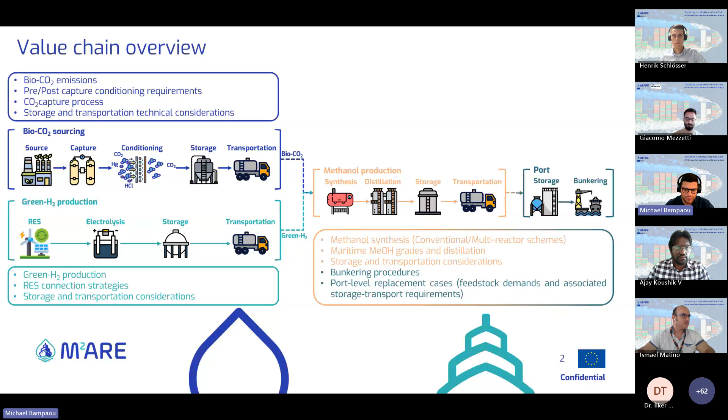So starting first with the bio-CO2 supply. So the bio-CO2 sector is a complex sector in terms of volumes of upstream processes, composition, impurities, and also emissions per plant. So in that case, we started by categorizing the different bio-CO2 emission sectors by low purity and high volume, which are the pulp and paper industry, biomass combustion, and also the biogas sector, and also regarding high purity and low volume, which are the bioethanol sector, food and beverage, and biomethane. So those sectors differ in terms of total CO2 emissions.

The CO2 concentration in the stream, for example, combustion-related processes, which are mainly referring to pulp and paper and biomass combustion, are diluted in terms of CO2 concentration, contain a lot of nitrogen and also NOx and SOx emissions. Seasonality aspects are also very important. For example, when biomass combustion is connected to a district heating plant, this means that the CO2 emissions will be higher towards the winter season where heating is required. Also, current uses of bio-CO2 are very important. For example, in the food and beverage industry, since CO2 is very pure, it is also used internally.

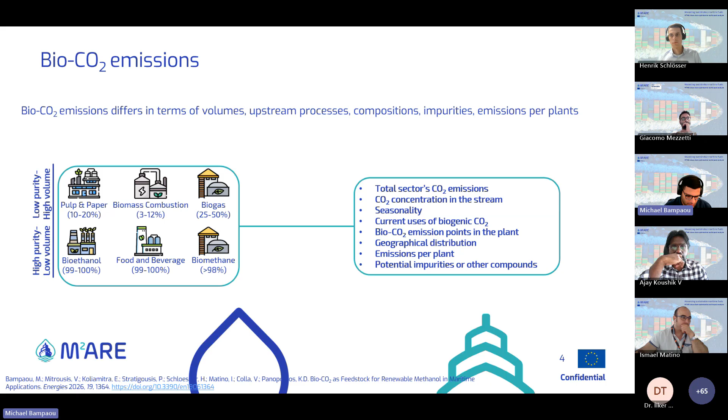Geographical distribution and the emissions per plant are very important also for the logistics, since larger plants with concentrated emissions, which is mainly the case for fossil plants, but also for pulp and paper and biomass combustion units, could enable economies of scale also for producing methanol in an economical manner. So also very important is the potential impurities or other compounds that might be included within the stream. And this is also very important since it depends also on the biomass feedstock and on the upstream process before emitting the CO2.

In that case, regarding the impurities, what we did is we performed within the project 4 sampling campaigns at 2 biogas plants and 1 biomethane plant and 1 biomass combustion plant. We also employed a CO2 capture unit using membrane gas absorption using a DEA mixture in order to offer a compact and relatively novel technology for carbon capture also for smaller scales. We evaluated the impurities across all the stages before, during, and after capture of that CO2.

So we performed the sampling of those plants and analyzed the solutions using standard analytical protocols, and also included the regeneration step to recover the high purity CO2. So what we found is that in biogas campaigns, after capture, the residual chlorides were higher than the catalyst tolerance limit for that particular sampling day and period. And also very important was that the NOx levels for the combustion flue gas were also increased, so it might indicate that you would need some pre-capture conditioning before applying the capture technology.

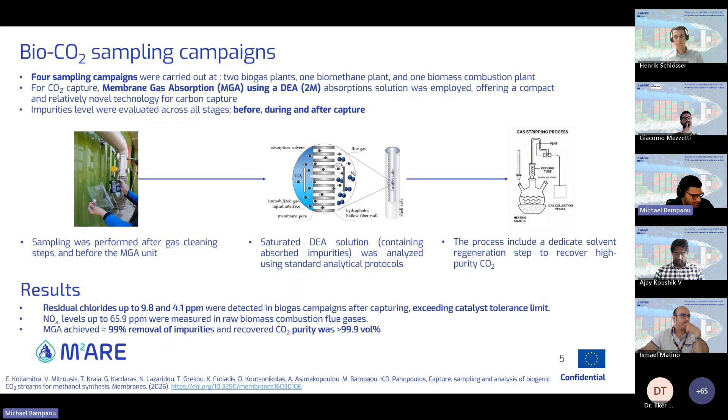And what we also showed was that approximately 99% of those contained impurities were removed using the MGA unit, and the purity was 99.9 volume percent of the CO2.

Now, going forward, after capturing the CO2, we would need to store it in order to account for the difference between the production and the usage of CO2. CO2 can be stored in a liquid or gaseous form, which will also differ in terms of the pressures and the temperatures that you would need for both forms. In terms of gaseous, there are also compression requirements to compress the gas to the storage pressure. And for the liquid form, lower volumes are required, but you will need specialized equipment.

In terms of transportation of the CO2, since in many cases methanol synthesis will not be done where the CO2 is also emitted, you will need to transport the bio-CO2 to the synthesis site. So this could be done with pipelines in dense or supercritical form. So you would also need compressors and booster stations to account for the CO2 and the pressure drop. And for lower volumes and short distances, trucks and rails are also employed in liquid form. And for ships, so for large scale and long distance transportation, we also see that there are liquid CO2 ships, CO2 carriers, currently ongoing and under investigation.

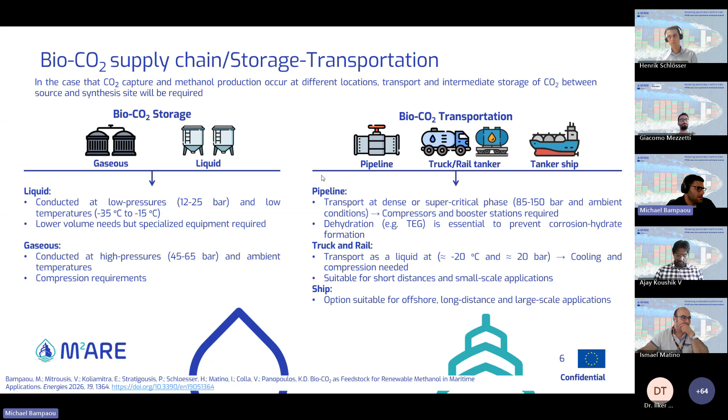Going towards the green hydrogen supply, green hydrogen is also a very restricting component in terms of the overall value chain viability. Green hydrogen can be produced with water electrolysis using renewable electricity, such as solar, wind, hydro, geothermal. The purity is a minimum of 99.9%, and the efficiency could range depending on the electrolyzer technology that is employed. In that case, the electricity price is the main cost driver for producing hydrogen, and afterwards will also be the main driver for producing competitive methanol. So if you can produce renewable hydrogen at a very competitive cost, this will be very beneficial for producing competitive methanol.

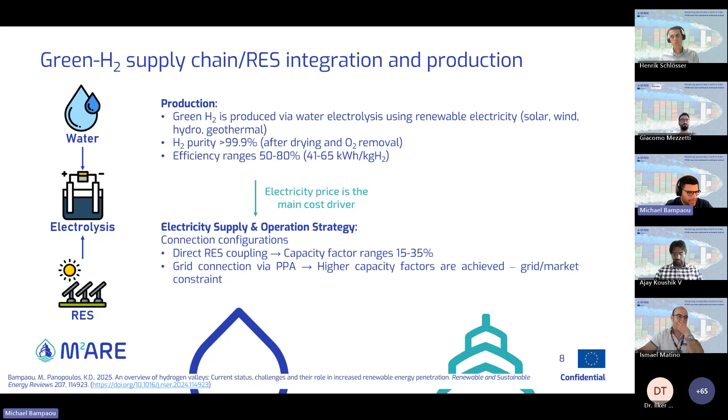Also regarding the electricity supply and the operation strategy of the electrolyzer, electrolyzers can be connected with renewable energy sources directly, which can lead to lower capacity factors overall. They can also be connected to the grid via, for example, certain agreements like a power purchase agreement. You can achieve higher capacity factors, but they are subject to grid and market constraints.

Green hydrogen can be stored as compressed gas, which is widely used and can lead to a certain energy penalty relative to the energy content of hydrogen, depending also on the storage pressure. Liquid hydrogen is also an option, but the liquefaction process is very energy intensive. There are also some other forms for storing hydrogen, such as cryocompressed, but they are at a lower TRL level and have a higher complexity compared to the other two options.

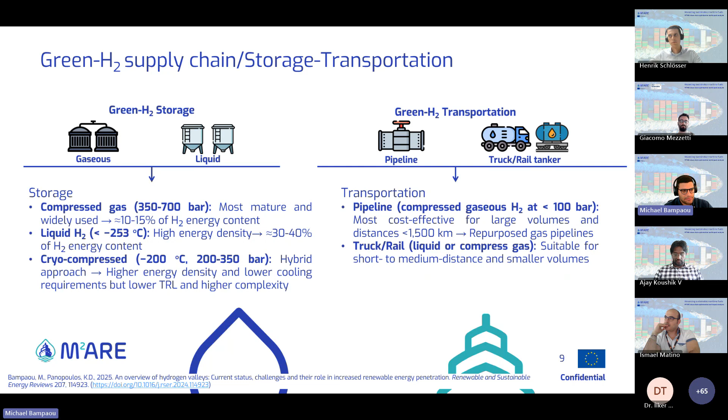Also, hydrogen can be transported via pipeline, which can be cost effective for large volumes and distances. Also, an option might be repurposing natural gas pipelines, and for short to medium distances at smaller volumes, trucks and rails are also an option to transport hydrogen when it is not produced on site. Now, going towards the methanol production process here.

Conventional methanol synthesis process includes a reactor, high and low pressure flash separation of the products, and a recycled stream in order to achieve higher conversion rates due to the thermodynamic limitations of the process. And finally, you can purify the product to achieve a grade that might be suitable for the engine that the methanol will be used. So you can remove the dissolved gases and the water to produce methanol that might be of MMA or MMB grade or MMC grade that contains higher water.

So what we also investigate in this project is the multi-reactor integration. So in this case, after producing methanol in the first reactor, the liquid products are separated through a flash, where in that way you can push the reaction towards the products again, so you can achieve higher methanol synthesis product amounts without even requiring a recycling stream, which can slow the dynamics of the process, and if there are high inert contents, also lead to accumulations of those components. It also would require larger volumes of the different components.

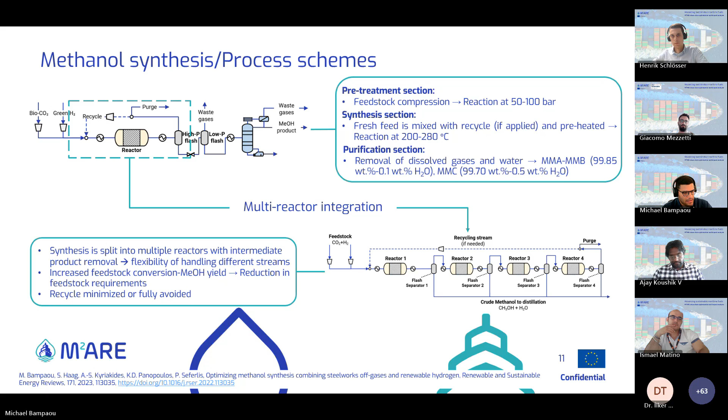So such a multi-reactor scheme has the flexibility of handling different streams, can lead to increased feedstock conversion to methanol, so reducing also the feedstock requirements, and you can minimize or fully avoid the recycling stream depending on the feedstock that you will handle. Now regarding the methanol purification, I hand over to Henrik.

Yes, so in order to test this new simplified crude methanol distillation, we actually built a pilot plant that is directly connected to the existing methanol synthesis pilot plant. So the feed is up to 0.5 ton of crude methanol per day. And then we are able to produce these tailor-made maritime methanol grades. So as mentioned, either these MMA, MMB, or MMC grades, but also to go even higher with the water content. So first tests show up to 20% of water and higher.

And all of the methanol that is then produced in this pilot plant is sent to the project partner Everllence for their engine tests. So within the frame of this research project, the goal is also to test different water contents, also higher than the current specifications allow. Because of course, if you purify your crude methanol less and have more water, it uses less operating costs. And also with this concept, we only need one distillation column instead of multiple ones, which are common in commercial large-scale processes. So we can also save on the CapEx side.

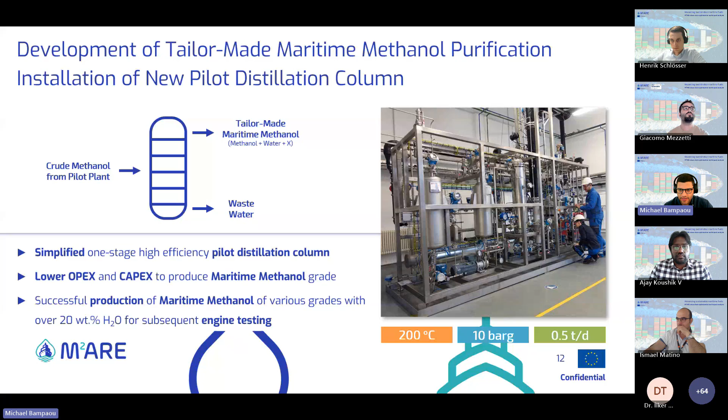Now continue with methanol storage and transportation. So a very important advantage of methanol is that it is liquid under ambient conditions. So it has easier handling than, for example, gaseous fuels like hydrogen. And you can use the existing infrastructure with some modifications, less modifications than, for example, for gaseous fuels. So it can be stored in ambient temperature and pressure with above ground floating roof tanks.

The most dominant method to transport methanol is through shipping and ocean transport, which is mainly due to the utilization of methanol widely in the chemical industry. For small to medium inland volumes and short distances, rail and road tankers can also be employed. Methanol pipelines are mainly used within terminals or chemical industrial sites.

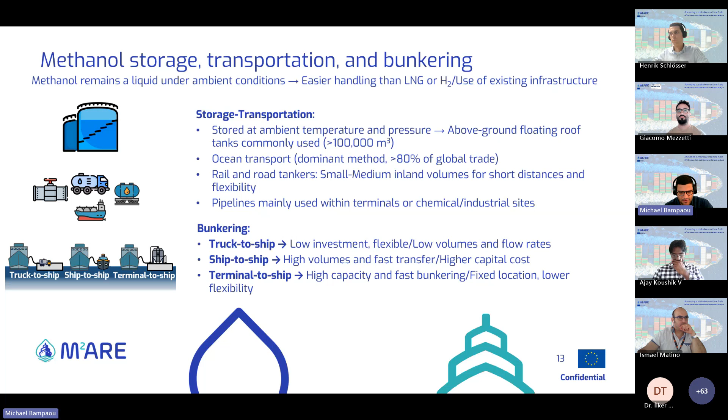There are also mainly 3 different bunkering methods in order to provide methanol to the ship that will use the methanol as fuel. For example, truck to ship has a lower investment and is more flexible, has lower volumes and flow rates. Ship-to-ship has higher volumes and fast transfer, but also has high capital cost. And terminal-to-ship is high capacity and can provide fast bunkering rates. The location is fixed and has lower flexibility.

Now, finally, going towards the analysis of the ports, what we did is we mapped the different bio-CO2 sources based on what we also showed in the first slide, the total sector emissions, the emissions per country, seasonality, current uses, and we also mapped them accordingly in the different EU countries. The same we did also for green hydrogen: where current green hydrogen capacity is located, and the short-term and medium-term targets for hydrogen production.

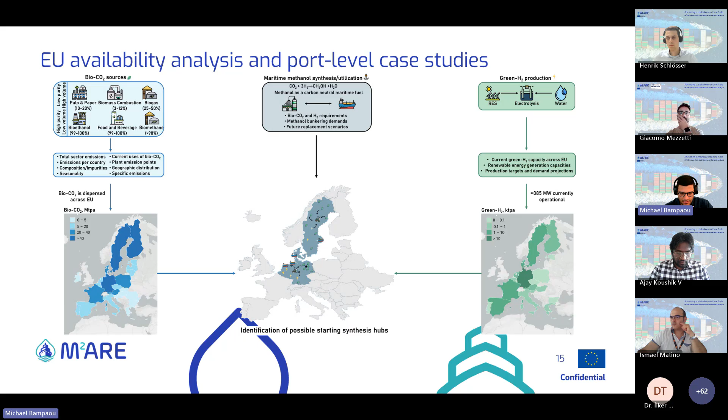And also we identified some indicative starting points in order to use the methanol in ports, where we also considered the port readiness and the activities currently underway in the different ports regarding renewable fuels and renewable energy projects. For the first two indicative cases we considered Rotterdam and Antwerp, the two ports, in order to see what the capacities of the different feedstock would be, how we can efficiently supply them, and if they are in line with the targets, for example, for green hydrogen.

Starting from bio-CO2, for three different starting points for replacement of the fuels, for example, 0.5, 1%, and 2%, you can see that single source supply, from 0.5 to 2% of the bio-CO2, would be feasible for very large scale plants like biomass or pulp and paper facilities. But for smaller scale emitters like biogas plants, other actions should be undertaken, like clustering of the CO2 to achieve the higher capacities required for that replacement.

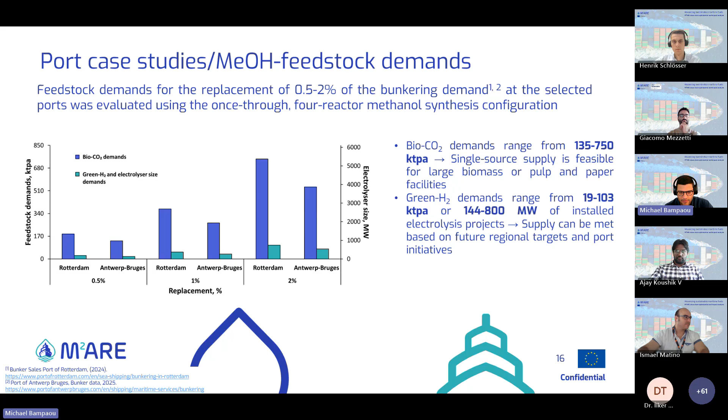Regarding green hydrogen, electrolyzer size demands could range from 140 to 800 megawatt, and based on future regional targets, this could be met if the targets from the European Union and the different countries are on track. Regarding the methanol, depending on the different scales of current methanol synthesis plants, these are within the range currently commercially applied. The challenges would be the capital investment, the operational costs, and the feedstock sourcing, which are the main restricting factors in that case.

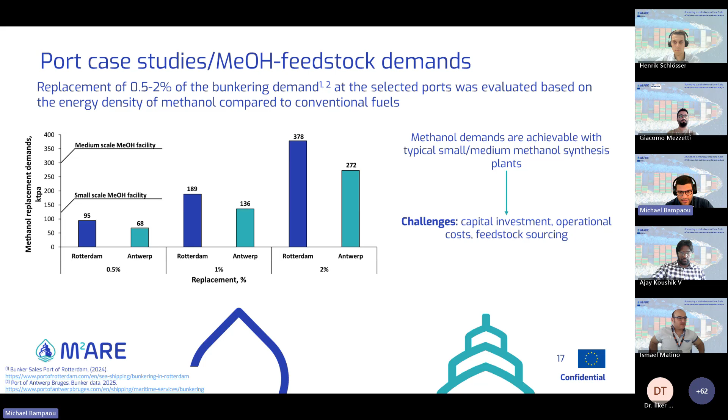Finally, what is also very important is that since methanol synthesis will most probably not take place directly at the ports, large volumes will need to be transported to the ports from the production locations, and the storage demands will also depend on the time frames that you would need the methanol to be stored there. Shorter time frames will increase the reliance on frequent deliveries, whereas longer horizons will provide greater supply security and resilience, but will require more space and more storage capacity.

Currently there are several terminals in the port of Rotterdam equipped for handling methanol, and the same is true for the port of Antwerp-Bruges. Regarding the transportation of methanol, for example, through trucks or rail, truck transportation will require the highest number of trips due to the lower volumes of methanol that can be transported. The main outcome here is that the ports need to have extensive inland connections to the methanol synthesis hubs, and be positioned to accommodate the methanol supply.

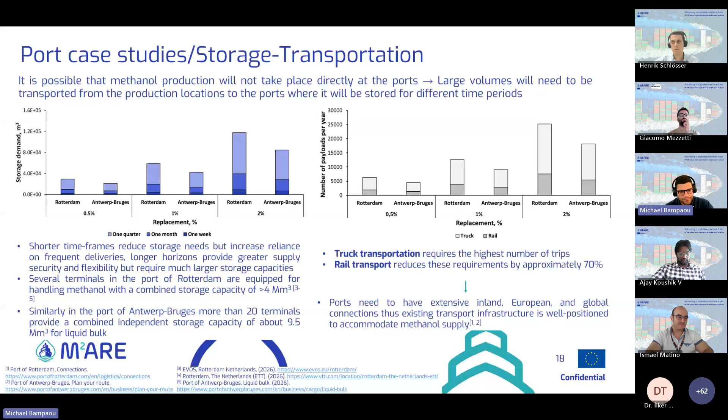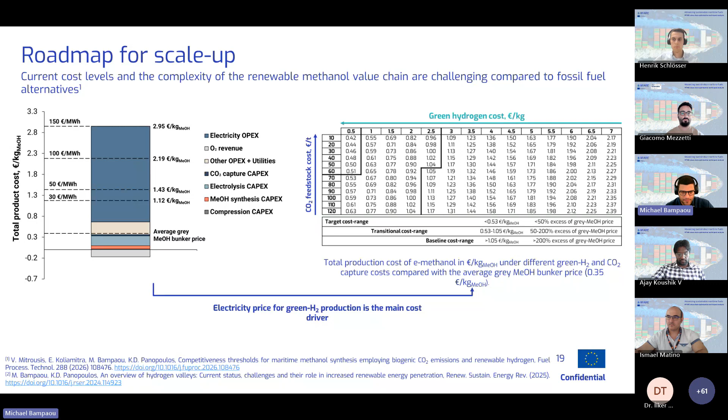Now, just as an overview, what we did here was a first techno-economic analysis, a case study for the biomass combustion plant where we also performed the sampling campaigns that we showed in the first slides. On the left side, you can see how the different electricity prices can affect the final methanol product. And on the right side, you can see how those methanol production costs relate to the current average gray methanol bunkering price at the port of Rotterdam. Green hydrogen cost and CO2 feedstock cost are the main components that can affect the competitiveness of methanol production for maritime purposes.

Now, the final slide: some recommendations and the roadmap to support integration and scale up. As we saw in the previous slides, for small scale emitters of bio-CO2 like biogas plants, bio-CO2 clusters and hubs could support integration and scale up, since they are typically small scale and geographically dispersed. And hydrogen valleys are also under development across the European Union. Hydrogen valleys are a complete hydrogen ecosystem from production until end use. In the future we can also use cheap hydrogen for the production of methanol.

Efficient methanol synthesis schemes, as we also saw in the previous slides, that can handle different kinds of feedstock, will provide flexibility and resilience for the process and can reduce the feedstock requirements. Dual fuel engines that can also use conventional fuels like diesel can be a short to medium term solution until methanol synthesis becomes competitive and available in ports across Europe. And also very important are maritime regulations, since the maritime sector is very conservative in terms of change. They can help close the cost gap and also enable scale up in the future.

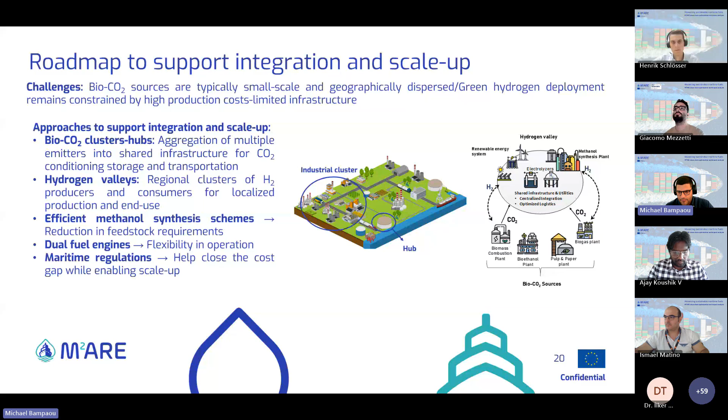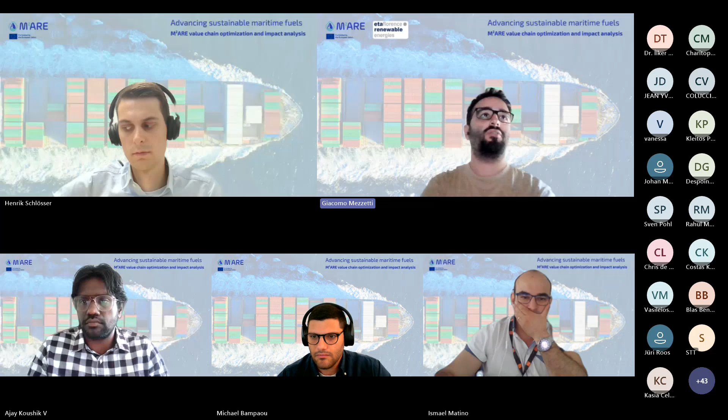So we have a question actually, so we can submit it now. It's from Taras Lenyuk. Hello, Taras. So the question is related to the methanol synthesis section, so maybe for Henrik. What type of reactor have you tested for single and multi-reactor integration schemes, and why?

So currently we have tested tubular reactors, both for the single and multi-stage concepts. And we are currently working on also pillow plate reactors, which offer better heat transfer and lower production costs. So this is what we're currently installing in the existing pilot plant to be able to compare the different reactor concepts with one another.

Okay, thank you very much, Henrik. So I will have just one from my side very, very quickly. During the tests that you conducted, was there any particular challenge or engineering barrier that you encountered? If not, you can say no. It's not mandatory, it was a very generic question.

Of course, there are a lot of challenges always when you build such a plant. For us, one of the main challenges is that as a research, we want to test as many operating conditions as possible. So our design parameters typically cover a wide range. And so within the design, we need to make sure that we can operate at all different conditions safely and reliably. Yeah, I see.

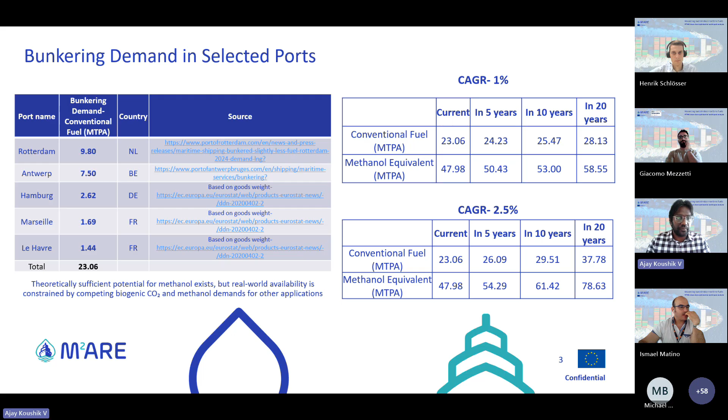So when I was discussing the slide on the circles, we mapped every single plant in these sectors in the 9 countries chosen, and this is the exact geographic locations of these plants. And you see some chemical symbols here, which are possible hubs where methanol can be produced. This is based on some GIS technique. We tried to find out some hubs closer to the plants. And the red ship symbols are the 5 ports that we chose for the supply side of it.

Now, looking into it, what we can infer is biogenic CO2 sources are unevenly distributed. Around France, we have a lot of biomethane plants. Around the Nordics, we have a lot of pulp and paper. So the sources are unevenly distributed. And the ports which we are interested in are geographically at a distance from these plants. They are not co-located, right? So this brings us to two different sets of problems.

The first one is a techno-economic layer, which Michael talked about in his slide on the cost of capture and methanol production and all that. Because the CO2 is available in different concentrations, quantities, and with different kinds of impurities, the cost of CO2 capture is going to be different. Also, the methanol production can cost differently based on how big the plant is, because a larger plant would lead to a lower per ton or per unit methanol cost. So that is one part of it.

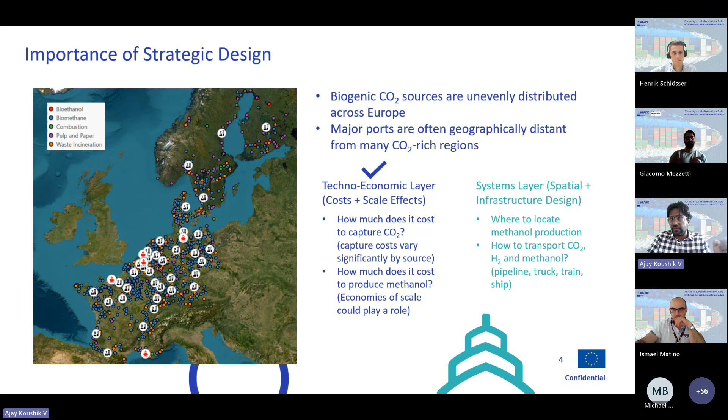Like I said, there are 5 different sectors, all with different characteristics because of size, because of impurities, because of the concentration of CO2 available. So we looked into all the plants and we said, okay, there could be a size range. For example, if you take biogas, there is a size range based on the available plants. Same with biomethane, same with all the sectors. So we chose 2 points on each sector, and we developed detailed models to estimate the cost of all the sectors.

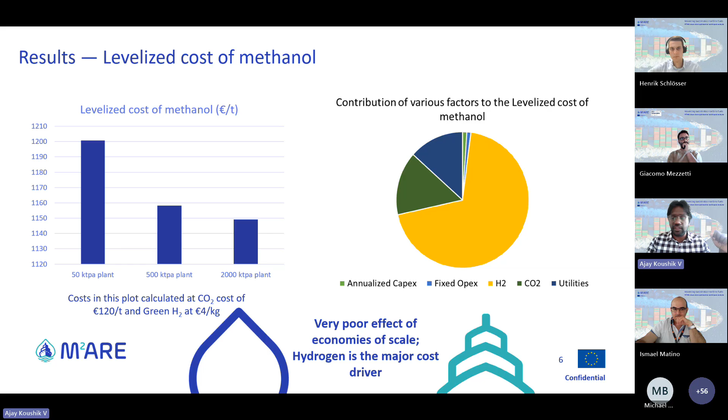And also we took 4 euros per kg, which probably is an optimistic cost for hydrogen. And this is how the methanol stands. Putting them all together, this plot, I'll try to take you through what it means. The sectors, as I discussed all over this presentation, let's imagine every sector is producing methanol from the CO2 of its own. So they will have a different methanol cost, which is what you see on the y-axis.

And these colored blocks here, the green, the dark green, blue, and all these represent different sectors. So for instance, if you take biomass combustion here, it means it costs around 1,120 euros per ton of methanol if you produce methanol from this sector. And it can produce so much methanol based on the availability in 10 countries. And the vertical lines you see here are the demands at different growth rates and different times.

So what it means is the red block you see here, the biogas, may not be necessary even under a high demand case, or unless CO2 is rigorously allocated to something other than methanol, then we are good with these three sectors, which are the combustion based, where the availability is quite large, and it can also satisfy the demand.

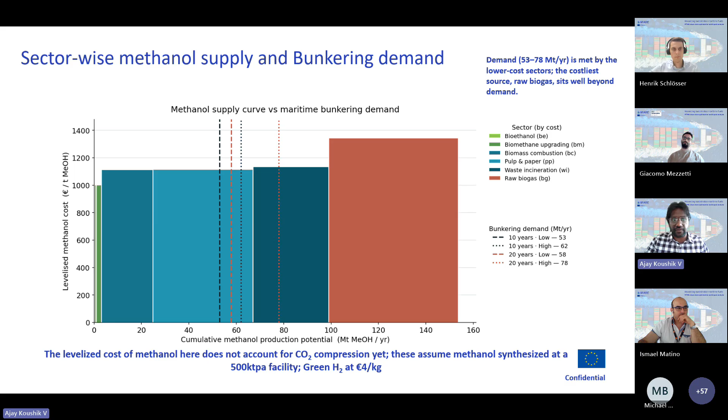Finally, a quick introduction on something called learning curves, for which we are developing a methodology right now. So technologies learn with time. When there are more electrolyzers, more compressors, more CO2 compressors, then we learn them, which means there will be a reduction in cost, lower capital cost, and the efficiency of these things will improve. For example, an electrolyzer can consume less electricity per kilogram of hydrogen, so hydrogen costs will go down with time. And when there is more deployment of methanol plants, the average size of methanol plants will go up, which also means there will be a reduction in cost.

So accounting for all this, we developed a methodology to see, under a severely optimistic condition, how low the cost of methanol can go. Here, it's based on the announced projects for e-methanol so far. It's 64 times more than the current capacity, and the prices can go as low as 720 euros per ton. But this is a very optimistic number; it's just to show you that the prices can go down. And with this, I would hand over to Ismael to continue his talk on production planning. Thank you for your attention.

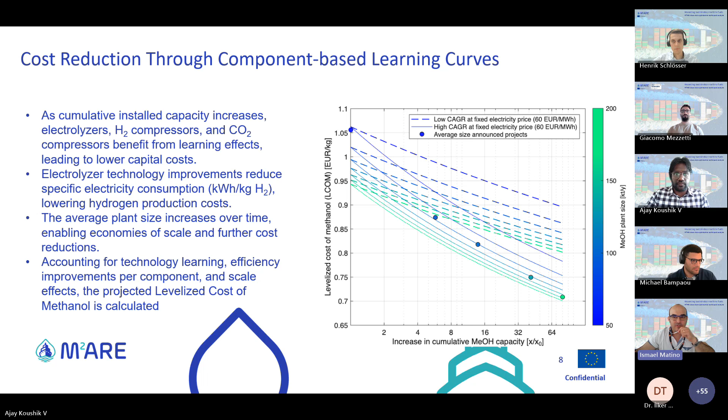Thank you, Ajay. Ismael, sorry, just a second, because we have one question in the chat box. Maybe you already answered, Ajay, but let's try to explore it. It's from Said Bentuba, and he asked the cost of energy consumed to produce 1 ton of methanol, and which technology is used.

I think it's a very generic question in some sense, because energy could mean a lot of things. But when you look into the cost perspective, if you take out hydrogen, then the energy itself is very little. It's less than 5% of the total cost, because the costs of CO2 and hydrogen are the major drivers, like I showed. And which technology is used? It's thermochemical synthesis, which has been widely explored. Thank you very much, Ajay.

So Ismael, please, if you want to continue with the presentation, you can share yours. Okay, perfect. One second. Okay, do you see my screen? Yes, perfect. Thank you.

So I will talk now about the second part of this presentation, the part related to production planning. That is one of the parts we are studying in terms of optimization in this project. With this slide, I want to highlight that this is not a mere optional exercise, but something very strategic. Why? Because in the context of the bio-CO2-based maritime methanol value chain, we have different challenges to be addressed. The key ones are listed here.

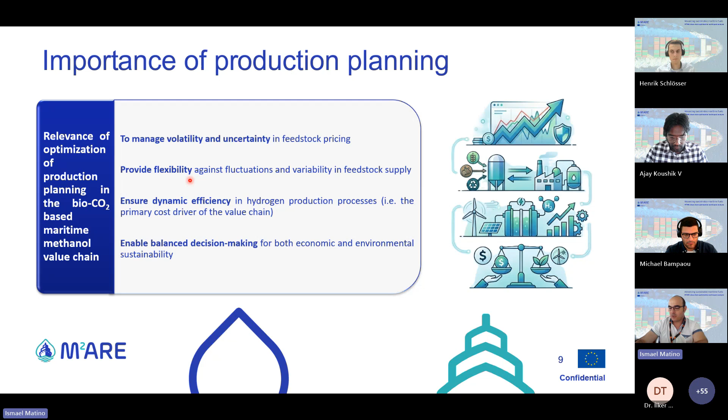Okay, going more in detail, we foresaw in our project to develop a tool that can allow us to optimize the whole value chain on different levels, 3 levels. The first level is the logistic and transportation level. That is something strictly related to LCA and TEA. So that is more or less what was presented by Ajay and by Michael to find the most promising location and transportation options. Then we have the second level, that is the one that I want to describe to you more in detail in these slides.

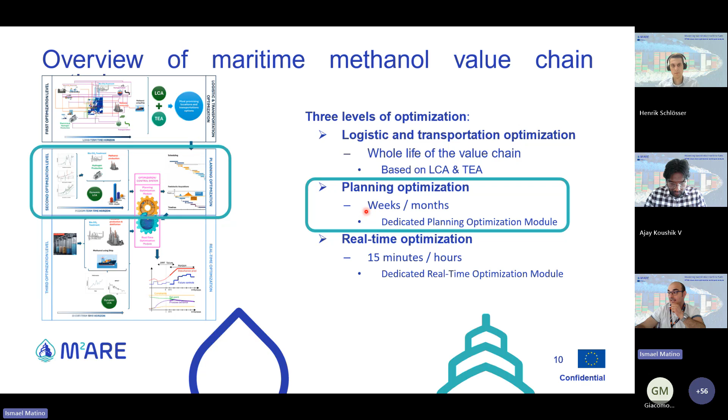That is the planning, the second level of optimization, the planning optimization, and that is more or less in the medium short term horizon of optimization. Then we have the short-term time horizon that is more operational optimization and real-time optimization. So today I will talk of the planning optimization. So something related to weeks, months, so dedicated planning optimization module.

Going more in detail, the idea is to plan the purchase of feedstocks in a horizon of 2-4 weeks. Why this horizon? Because a longer horizon is not trustable due to the prediction of cost and the uncertainties in cost. Then we want also to plan the production, considering also the expected demand of the maritime methanol.

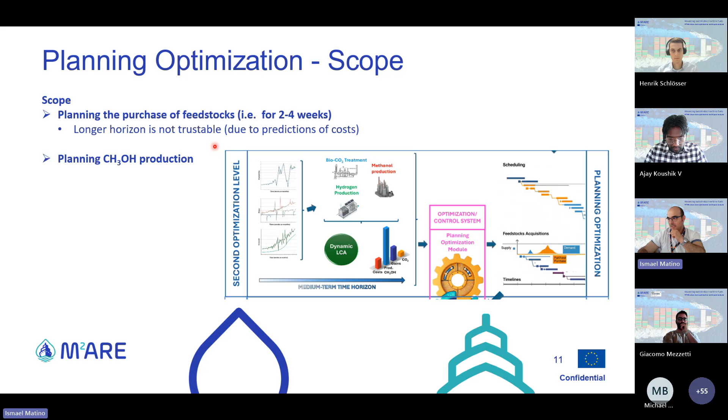But for doing that, we have to include all the aspects that belong to the value chain. Obviously, in a simplified manner, because, as I already said, there are different uncertainties. We have also to fit with the optimization constraints in terms of computational burden and so on. So we have in some way to simplify some aspects, but we want to include all the aspects of the value chain.

For instance, starting from the producer, so from the feedstock of bio-CO2, we are including in our optimizer models that allow us to consider and predict availability and cost, the average composition, and the cost and energy demand of additional treatments. These allow us to consider some penalization for some of these bio-CO2 feedstocks. As well, we will have some dynamic models for considering the variation of the storage of this bio-CO2.

As well as we have dedicated models for the part related to the hydrogen. Hydrogen that can be both purchased or also produced on site. And so in this case, we have also to consider storage. For the purchase, we developed advanced models based on machine learning and on artificial neural networks, specifically deep echo state neural networks, allowing us to predict some days ahead the hydrogen price, as well as also renewable energy production.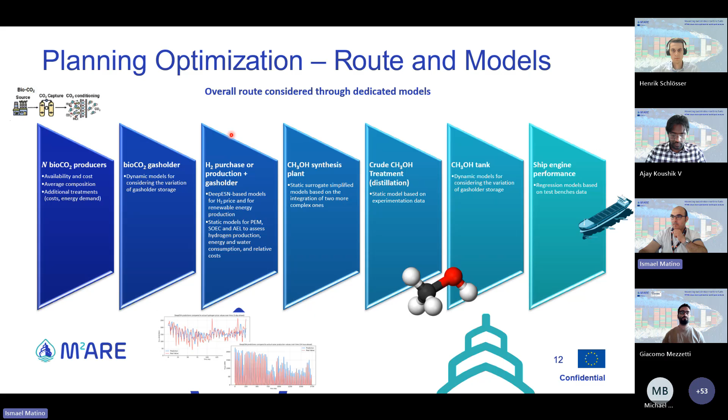But before going on to the mathematical representation of the problem, I want to give you also an overview of some assumptions that we included in our consideration. Okay, the horizon I already said. We consider a granularity of 1 day.

We consider markets that we know in some way, with models or in other ways, also the cost and availability of feedstocks, as well as we assume that CO2 purchased arrives in the same day. We know also the methanol sale contract. We included also some storage assumptions. So the capacity of the storage, here there are only some examples, but it could be adapted to the plant size. Again, as I already said, we include a static model for the methanol plant.

We want to consider the cost of the distillation for achieving specific qualities in terms, for instance, of water content in the produced methanol. And again, also hydrogen, as I say, we want to describe with static models.

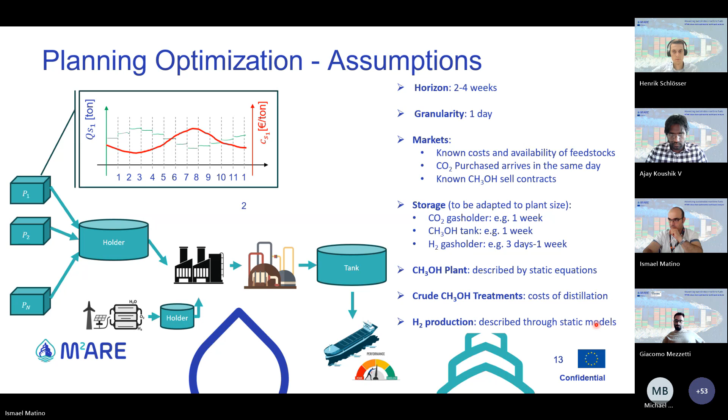Okay, going more in detail on the problem formulation, I want to show you some aspects that we consider very important for better understanding how the planning can be optimized and what are the most important parts. Starting from the most critical one, that is the hydrogen production. I say that this is very strategic, and if we want to produce hydrogen on site, we need to consider some aspects. And for doing that, we consider the possibility of binary modulating the active stacks of the electrolyzer according to the demand of hydrogen and also the available

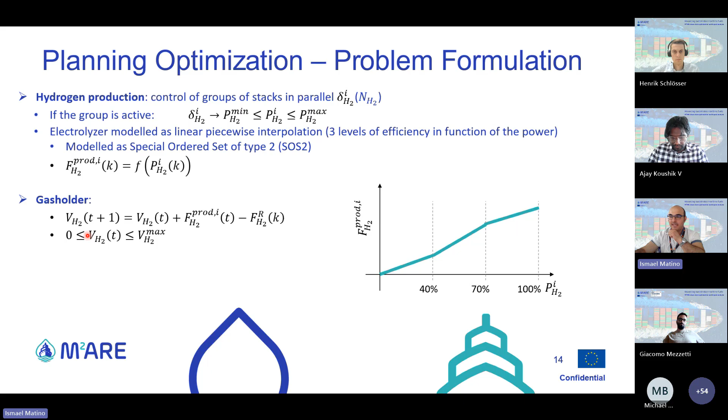renewable energy. And to be more realistic, due to the fact that the efficiency of the electrolyzer is not linear with respect to the operating power, we simplified, again for respecting the constraints of the optimizer, with a piecewise interpolation the curves that correlate the efficiency as a function of the power. Then here you can see how we consider the variation of the availability of hydrogen when it is produced. So it is stored, and then we consider also the variation of the availability in time.

Then there is the part related to the feedstocks, where there are some related constraints. One of the most important ones is the translation of some contracts into constraints. And also we consider some maximum availability for the different sources as a function of the period, because some sources have a big seasonality to be considered. Again, there are also equations related to the storage.

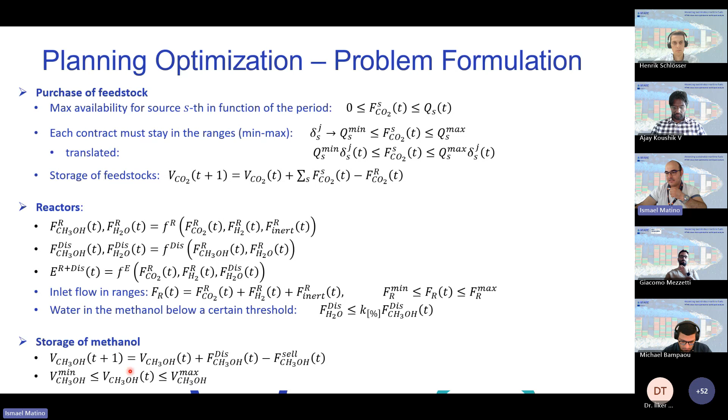For reactors, I already said that we consider some simplified aspects, such as the efficiency, the conversions, and the production as a function of some operating conditions, as well as of the characteristics of the feedstocks. And we consider also the aspects related to energy, and constrain also the part related to the water, because the water is the most critical aspect for the usage of methanol in the maritime sector. Here, the storage part of the methanol, and then the part related to the engine.

How are we considering that? We are considering it with an integrated penalty factor, here expressed as a function of the different aspects that affect the performance of the engine, that are the fuel consumption, the exhaust emissions, and the crankcase emissions that are related strictly with safety, for instance.

In order to simplify the problem, and to make it a function of only the water content inside the produced methanol, we assumed an engine load that can be fixed in two ways: in a worst case approach, so considering the load that provides the worst performance, or in a more realistic case, a duty cycle approach. So something that considers how the ship is generally managed during its operation. Obviously, it depends on the ship, but we can decide different loads, for instance.

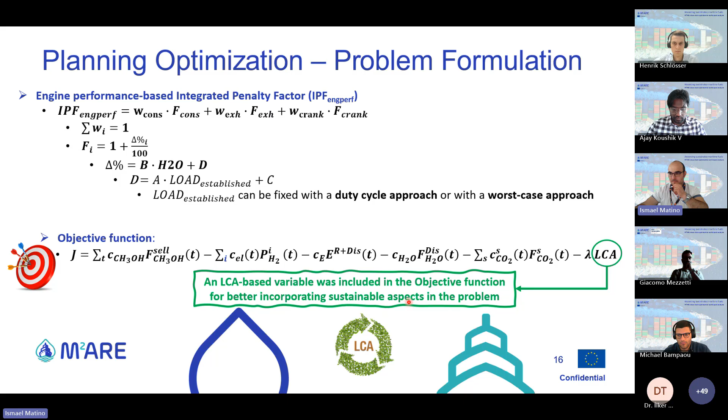Concluding. From what was presented by Ajay, he presented the path to cost-competitive methanol, and that one of the key challenges is the allocation, since potential methanol availability exceeds maritime demand, and the fact that, as I also repeated a lot of times, green hydrogen is the dominant driver of methanol cost.

Then it is clear that also the high purity CO2 is limited in availability. So concerning bio CO2-based methanol production, this could be a very critical aspect. But if we consider the whole methanol production, it is expected that the combustion-based sectors are expected to be the primary contributor to the methanol synthesis, due to the fact that they provide higher content of CO2, but if you consider the bio CO2 part, also the combustion-based sectors are the ones that provide more stable availability of this feedstock.

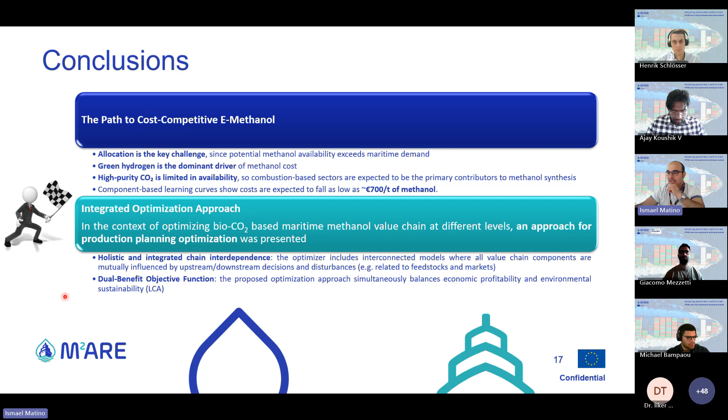Okay, so what do we expect to do in the future? To complete the spatial optimization problem introduced in the strategic design analysis, to investigate also other competitive maritime fuels in order to make some comparison, to explore alternative routes for producing renewable methanol, and also to conduct a life cycle assessment for all the selected pathways in order, again, to complete the analysis.

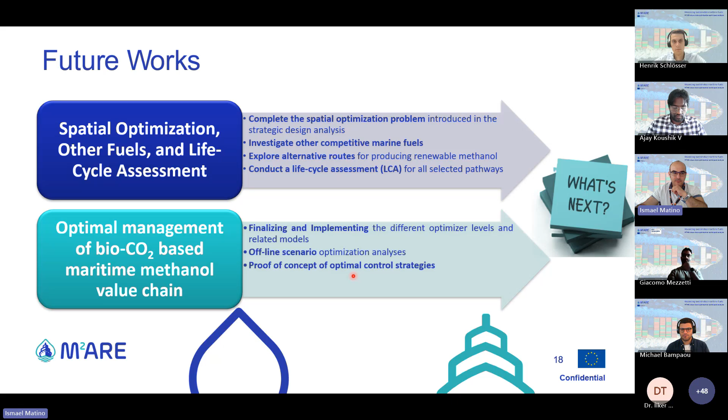From the optimal management of the bio-CO2-based maritime methanol value chain, we have to finalize and implement the different optimizer levels. After that, we expect to make some offline scenario analysis in order both to check the tool, but also to provide some analysis. And everything will end with a proof of concept of the optimal control strategies, in order to close the loop of the optimization.